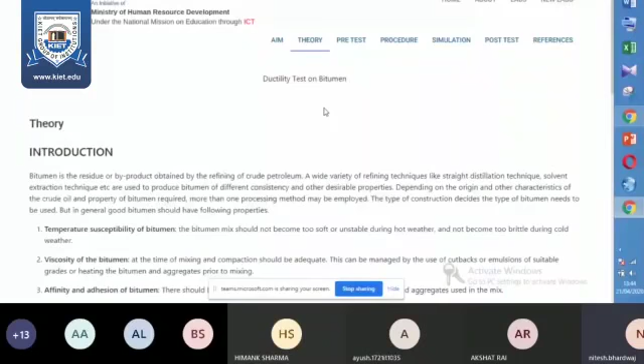The next important thing that we have is the theory of the bitumen ductility test. We can see it has been very beautifully listed what are the three most important properties that a good bitumen should have.

Going a step ahead, the institute is now enabling its students to undertake labs and carry out practical assignments from home through virtual labs. We are one of the few educational institutions in the state providing practical classes to students in an online mode.

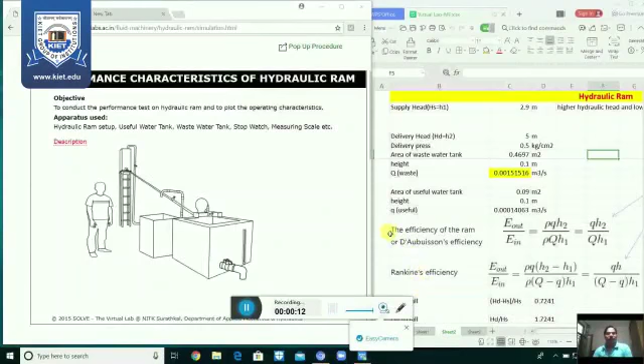Good morning, dear students. Today I'm going to discuss the experiment of hydraulic ram on this virtual setup.

Virtual Labs is a project initiated by the MHRD Government of India under the National Mission on Education through Information and Communication Technology. These labs are developed by various IITs across the country in different areas in virtual mode. KIET Group of Institutions is the nodal center of Virtual Lab IIT Delhi.

All the students of KIET in all the branches are using the virtual lab for their practical assignments during the lockdown.

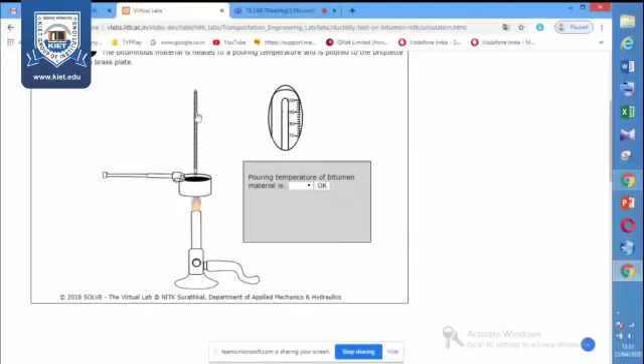During this COVID-19 lockdown, teachers inform students about the experiment and guide them online. Students are getting dual assistance from their teachers as well as from the virtual lab.

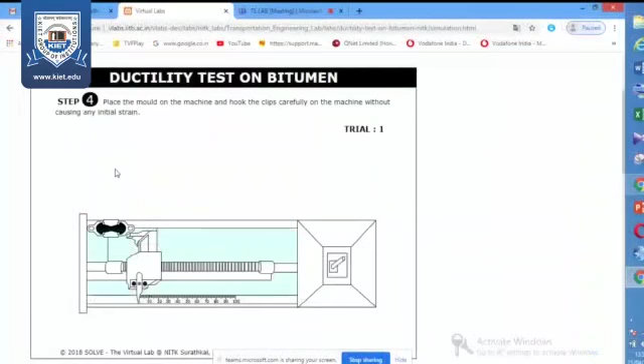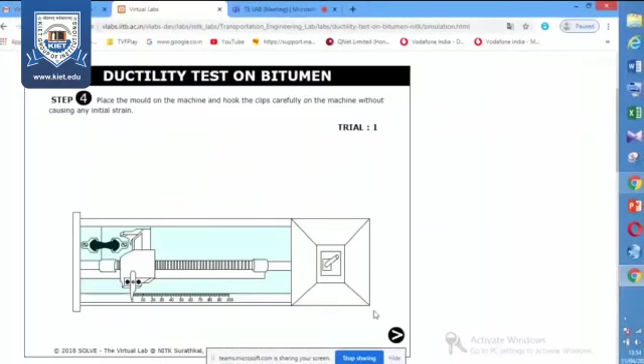Virtual lab portals are accessible to students anytime from anywhere and are absolutely free. All the departments at KIET Group of Institutions are using different virtual lab platforms for enhancing the practical exposure during lockdown.

Electrical engineering department using virtual lab developed by IIT Bombay for giving practical exposure in different core areas like electrical machines, power system, etc. CS department, IT department, and MCA department using virtual lab resources developed by IIT Bombay for completing experiments for the students in areas like peer-to-peer topology, star topology, IP addressing, IP subnetting, window file sharing, etc.

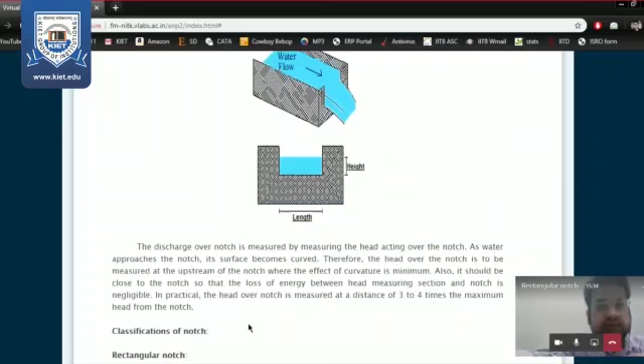Civil engineering department used virtual lab for completing experiments in different subjects like strength of material, and ductility test to determine ductility value. Our electronics and communication engineering department using virtual Amrita laboratories and virtual labs developed by IIT Kanpur for conducting experiments in different areas like frequency modulation, Nyquist plot, root locus, demodulation, etc.